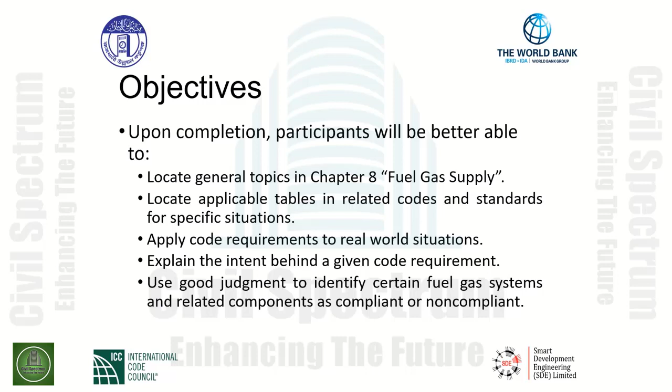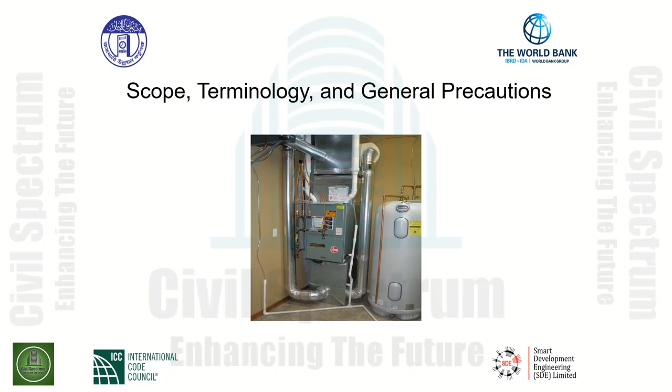We will be discussing the scope, terminology, and general precautions related to fuel gas supply, piping, and appliances. Chapter 8, Section 8.1, General. This section regulates aspects of fuel gas distribution systems, including the design, installation, testing, repair, and maintenance.

The applicability of this chapter is limited to the customer's side or the consumer side of the gas supply company's distribution system. It does not cover any utility, any company's distribution. We are concerned with this point that the customer receives the supply from the company's endpoint of this system. The code governs all piping and system components from the endpoint of the gas supply company's service line to the

supplied appliances and equipment. This is important language because we need to know where we need to start when we reference this code, so it lays out a very clear determination of where we begin our administration, enforcement for design and installation, testing, repair, and maintenance of these systems. The point of delivery is used to determine where the code begins and ends. So that terminology, point of delivery, will be a discussion point for us to go over and clearly see where this code begins and, of course, this code ends.

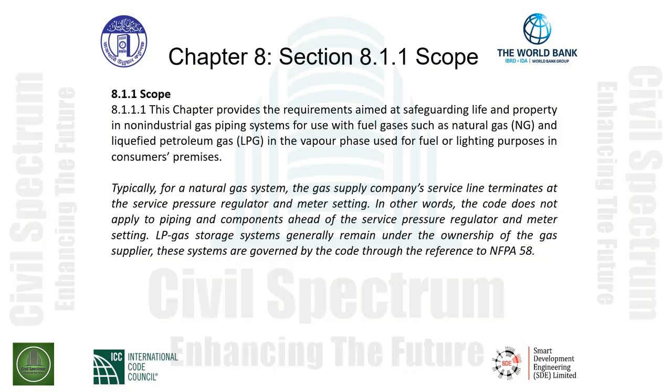Section 8.1.1.2 gives us references. As stated here, this chapter does not cover the safety requirements and rules for gas burning appliances. The requirements come from the National Fuel Gas Code 2009 edition, the NFPA 58 2008 edition, as well as the International Fuel Gas Code 2009 edition of the USA, and shall apply for such appliances. This section gives us the indication and directive for the code user to reference other codes for the safe installation of gas burning appliances.

So we will reference certain parts of the 2009 edition of the International Fuel Gas Code in this seminar, with key areas related to piping systems, appliances, and equipment regarding safe operation of appliances.

Section 8.1.1.3 gives us requirements of this chapter that state it does not apply to gas piping systems for industrial installation and applications. So we must completely understand that Chapter 8, Fuel Gas Supply, provides designers, contractors, and owners with information regarding whether this code applies to a given application or not. In this case, it's very clear that any industrial installations and applications are not part of this code. So the chapter does not apply to industrial installation and any industrial applications.

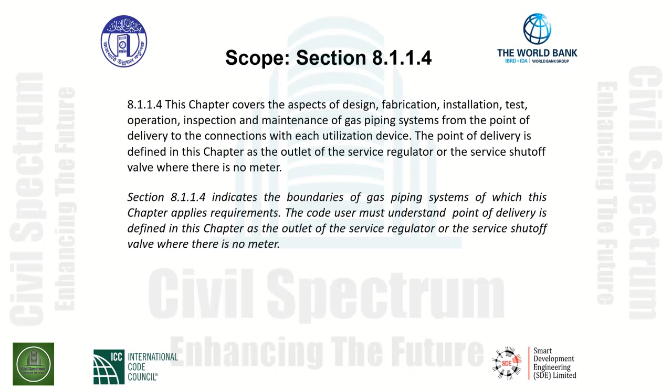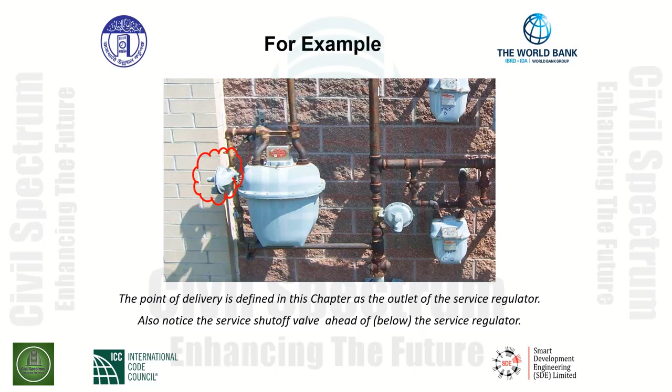For example, the picture that we're showing here is an indication of point of delivery. So the point of delivery is defined in this chapter as the outlet of the service regulator. Also notice the service shutoff valve ahead of the service regulator. What's clearly marked here is you can see towards the middle of the picture, the gas piping system comes up from an underground supply and rises up into a T. The left portion of the piping system from the branch of the T goes up and services the service regulator and enters the meter, supplying gas to the consumer side. So what we're really looking at here is the point that this code regulates the gas system, and you can clearly see that it is at the outlet of the regulator as indicated.

This section in particular gives us further detail. And as you can see, when we step through these sections in the scope, we have more and more details about the system. So section 8.1.1.5 gives us this requirement.

Piping systems covered here are limited to a maximum operating pressure of 3.45 kPa. The conversion is 14 inches water column or half PSIG. The maximum pressure must not be allowed to exceed 3.45 kilopascals. Displayed below is a meter assembly equipped with a service pressure regulator that can be set to a safe operating pressure after the point of delivery to the customer's gas piping system.

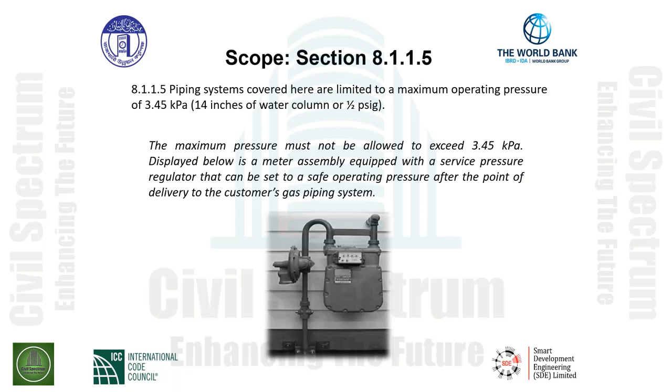As seen clearly here, the gas supply emerges from the underground piping system. It goes into a valve, which is your service valve, and out of the service valve into the service regulator. As an example, we have an LPG system here. The piping systems that are covered here, again, we reference code section 8.1.1.5, and we are limited to a maximum operating pressure.

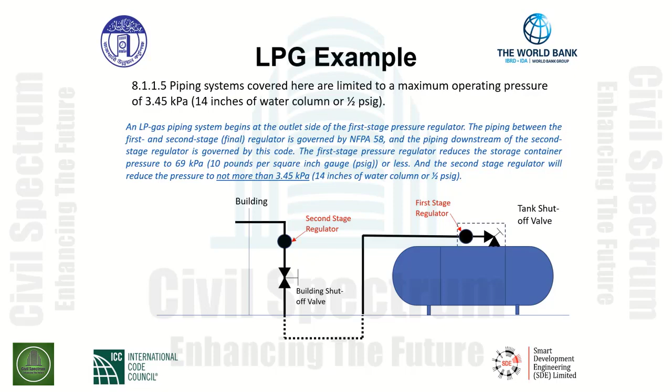Section 8.1.1.6. The manufacturer's installation instructions are evaluated by the listing agency, verifying compliance with the applicable standard. When we look at the listing agency, it can require that the manufacturer alter, delete, or add information to the instructions as necessary to achieve compliance with applicable standards and code requirements. We look to Section 8.1.1.6 as indicated here as a requirement of our gas code.

While applying the provisions of this chapter, reference should also be made to the manufacturer's instructions, not only the gas company supplies regulations, as well as other applicable codes and standards listed in this chapter or required by the authority having jurisdiction. This is a complete list of what has to be followed when we install, when we design appliances for our buildings that are supplied by fuel gas, whether it's LP gas or natural gas.

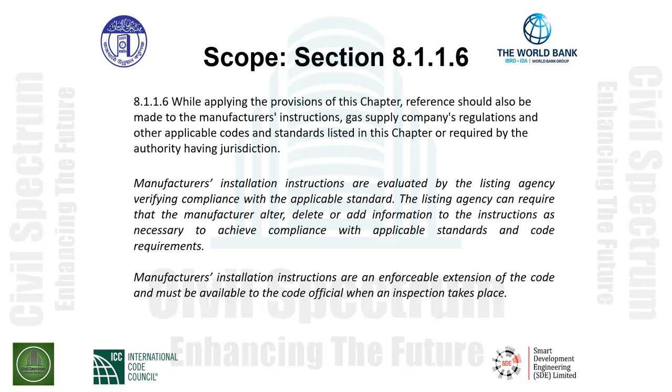Section 8.1.2, terminology, is a part of the code that gives us some good language here because we need to understand the terminology when it comes to gas systems. Not only gas piping systems, but references to components on the gas piping system. We use this section in our code that gives us the language to understand where this terminology comes from. So it starts off like this in Section 8.1.2 terminology. This section provides definition of terms used in this chapter of the code.

Where terms are not defined in this chapter, they shall be defined using their ordinarily accepted meanings, such as the context implies. The definitions in the chapter are the same as used in the National Fuel Gas Code 2009 edition. That's the NFPA 54 document, and the NFPA ANSI standard as well for liquefied petroleum gas code, NFPA 58, as well as the International Fuel Gas Code 2009 edition. And the last reference here in this code section is the National Building Code of India 2005 edition.

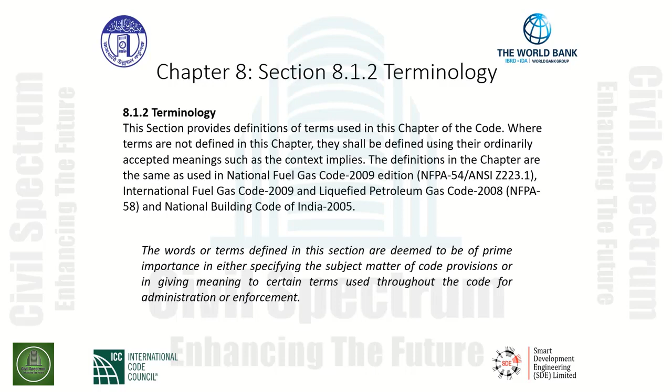As we continue our discussion of terminology, you must understand that a code provision could be misinterpreted if the definition of a term, as used in the context of the code, is not understood or not completely understood. The following slides will provide key definitions that will assist the code user to properly understand certain fuel gas components, appliances, and various equipment. We need to fully understand the terminology as given to us in this code for proper administration and the intent of this particular code.

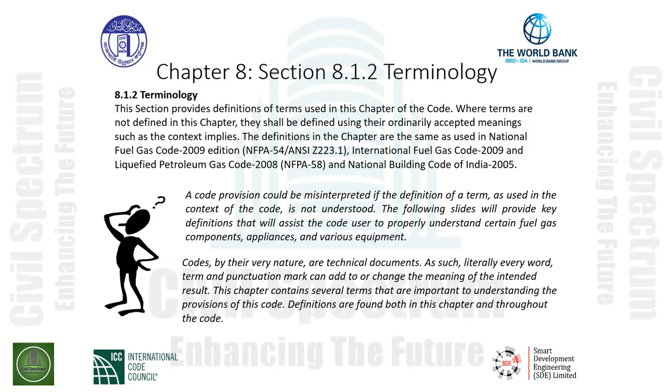Codes, by their very nature, are technical documents. As such, literally every word, term, and punctuation mark can add or change the meaning of the intended result. So this really drives us to understand the technical terminology of this code. This chapter contains several terms that are important to understand the provisions of this code. Definitions are found both in this chapter and throughout the code.

The next definition is appliance valve. This is a device that will shut off the gas supply to the burners. So the appliance valve that we're talking about here is the valve that we utilize, of course, to shut the gas supply off to the burners.

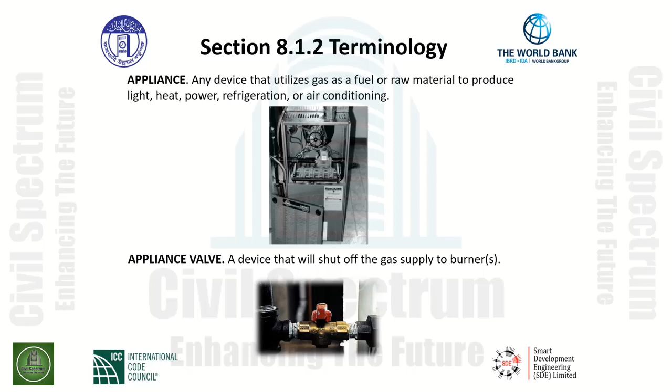Consumers or customers connection. This is the next definition or terminology that we need to understand. You recall the point of delivery. The point of delivery is in conjunction with this definition. And this definition states: piping tapped on the riser to supply gas to individual customer or consumer. The graphic shows that the customer's connection, of course, is at the outlet of the service regulator. And this is where we have the demarcation for the beginning of the system that is regulated by this code. Very important definition here.

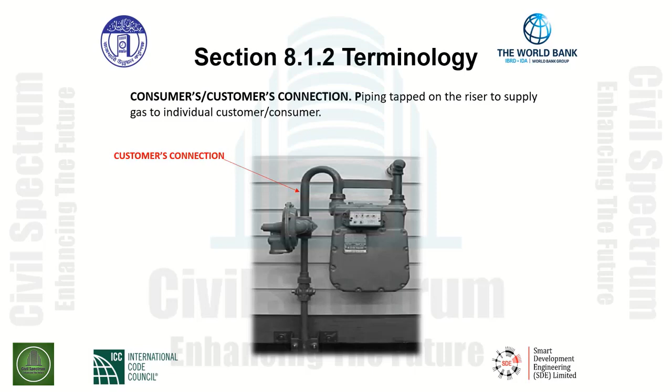In section 8.1.3, General Precautions, we have further information to go over to completely understand what we need to do with respect to any precautionary measures when we work on or install the gas piping system. Section 8.1.3.1 is titled Turn Gas Off. All gas piping work or gas appliance installation shall be performed with the gas turned off to eliminate hazards from leakage of gas.

This is very important here because not only do we have to protect the workers working on the gas line, but also the building occupants. We do not want to remove any fittings, any valves, any other components on the gas line without properly turning the gas off. In other words, when you turn the gas off, the function of purging, bleeding the gas out of the lines completely before working on certain sections of the gas piping system is important.

And when we relieve the pressure, we want to make sure that we relieve it somewhere to the outside of the building, never inside of the building, because that could create a mixture of gas leaking into the building, mixing with air, and it could be potentially damaging. We need to protect the property as well from potential fire and maybe explosive conditions. So that's why this section is in our code, because it is safety, and it is required for anybody working on the gas system to turn the gas completely off.

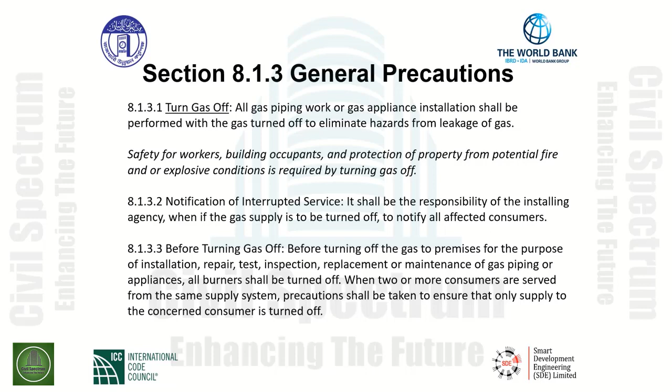Given the precautions that we've gone over, there are a few more safety concerns that are indicated in this code here, specifically smoking. Section 8.1.3.8 gives us this requirement: when working on piping which contains or has contained gas, smoking shall be prohibited. This is a major concern here. We do not need any source of ignition when we're working on gas systems due to the potential of ignition, fires, explosions, things of that nature. The potential regarding the ignition of gas vapors by workers is of particular concern while working on the gas piping. And as seen here, smoking is specifically prohibited in this section.

Handling of flammable liquids is given to us in section 8.1.3.9. Flammable liquids used by the installer shall be handled with proper precautions and shall not be left within the premises from the end of one working day to the beginning of the next. Any type of flammable liquids must be taken off the premises. We cannot leave any type of flammable liquids there due to the inherent hazards that may be affected to the people within the building. They must be taken off the premises at the end of the working day.

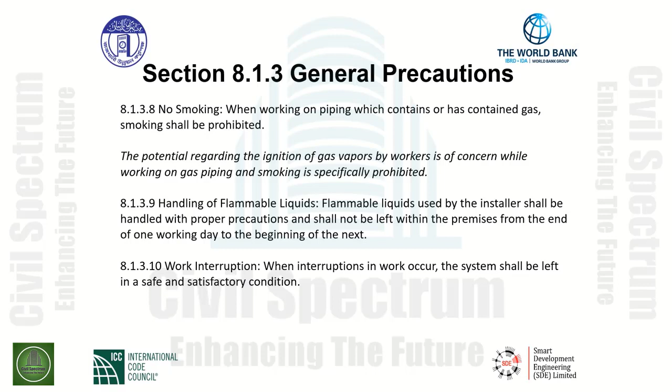Whenever interruptions in work occur, the system shall be left in a safe and satisfactory condition. The very last section here on this slide indicates that whenever you have interruptions in the work, we need to leave the system in a very safe and satisfactory condition. If we're working on the piping systems, ladies and gentlemen, and we have to replace a faulty valve, we first begin with shutting down the gas piping system. Opening up the system, replacing perhaps a faulty valve, we need to make sure that the gas piping system has then been tested for any leaks and left in a safe and satisfactory condition. So, a good general precaution.

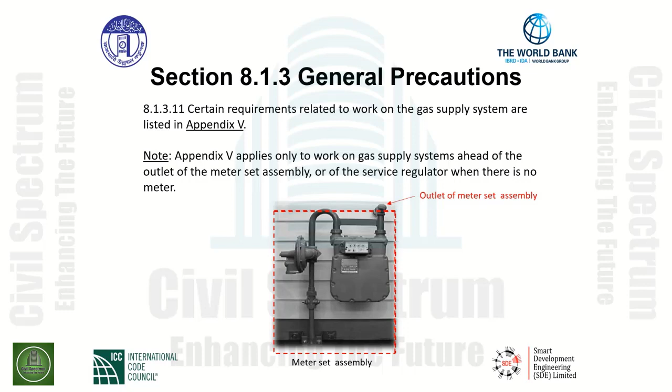In section 8.1.3.11, we are given a direction regarding requirements when we are working on the gas supply system. As seen here in this particular section, certain requirements related to work on the gas supply system are listed in Appendix V. A particular note when you reference Appendix V is that it only applies to work on gas supply systems ahead of the outlet of the meter set assembly or of the service regulator where there is no meter. We have a picture here indicating the meter set as well as the service regulator. So it's very clear that Appendix V applies to systems ahead of the outlet of the meter set. As indicated in the picture, the outlet of the meter set assembly appears on the right-hand side. If there were no meter, then it would be at the outlet of the service regulator. Appendix V is very clear about where the work begins with respect to the requirements of this code.

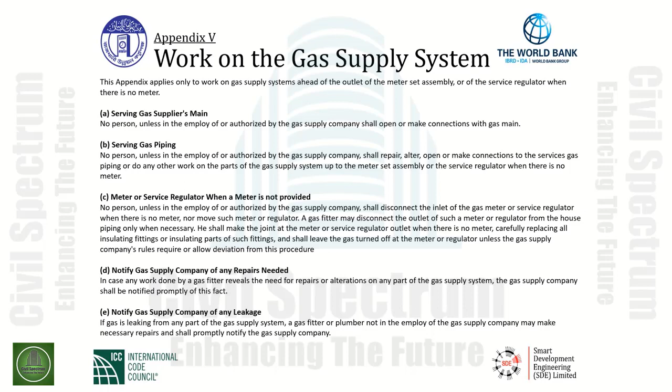Now, the very last one here, notify gas supply company of any leakage. This is item E. If gas is leaking from any part of the gas supply system, a gas fitter or plumber not in the employ of the gas supply company may make necessary repairs and shall promptly notify the gas supply company. There we have it, Appendix V. This is where we go to work on gas supply system. All the requirements are given here to the code user.

Notification of completion. Section 8.1.4.1 gives us, when regulations so require, the completion of installation shall be notified to the gas supply company or the authority. So whenever we have a new gas system installed, we need to notify the authority for proper installation, maybe inspection, testing, and startup of the gas system.

Section 8.2.2 is titled Size of Piping to Gas Appliances. This section is very important not only to the designer but to the installer as well. Properly understanding some of the design constraints, the analysis that has to be done before any gas piping system is even proposed, we need to understand certain factors that go into the design procedure.

Section 8.2.2.1 gives us the following. Gas piping shall be of such size and so installed to ensure adequate supply of gas to meet the maximum demand without undue pressure drop between the meter or service regulator, where there is no meter, and the appliance or appliances. Section 8.2.2.2 tells us a little bit more about the factors that need to be considered here. It indicates the following. The size of gas piping depends upon the following factors.

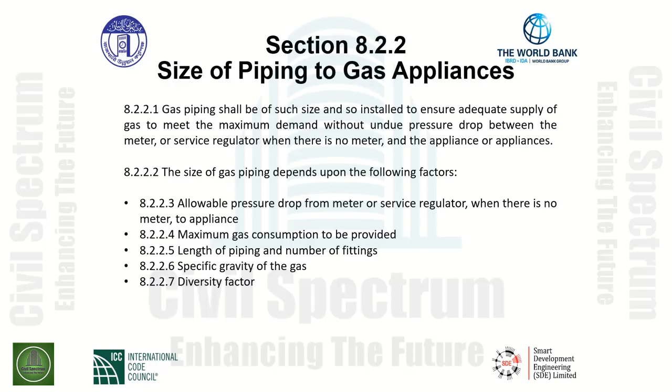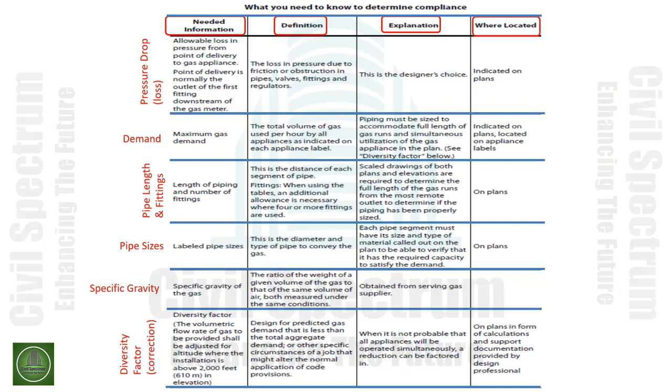Unless, of course, there's some diversity factor that we discussed, as indicated in the previous chart. However, any exceptions to this principle must be substantiated with full documentation in a plan review of the gas piping system. The systems must contain adequate capacity for anticipated modifications, maybe additions, or additional appliances. The evaluation must be conducted on the complete system as it will be configured after the appliances are added.

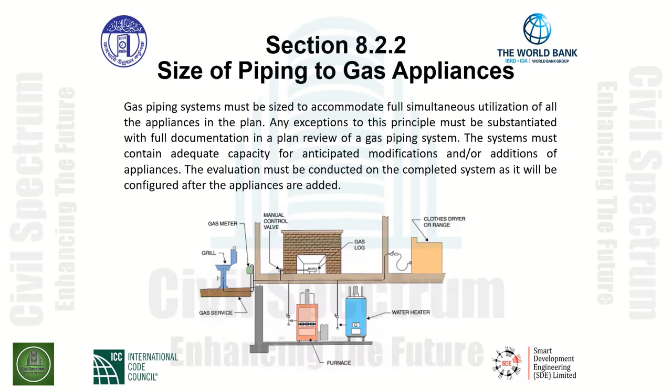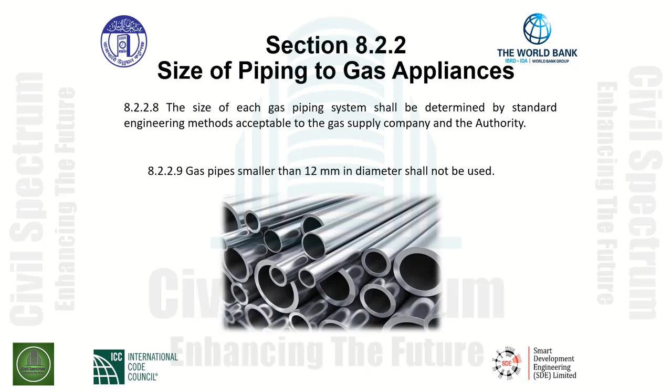Section 8.2.2.8, the size of each gas piping system shall be determined by standard engineering methods acceptable to the gas supply company and the authority. We will first look at Section 8.2.2.9. Gas pipes smaller than 12 millimeter in diameter shall not be used. This is the first requirement that is limiting the materials that are permitted to be used. So in this case, we cannot use any piping smaller than 12 millimeter in diameter.

We have a prohibited material here in the next section. And again, we're talking about acceptable piping materials. Section 8.2.3.1 gives us a reference as seen here. It indicates the following: piping material shall be one of the materials listed in Table 8.8.1, conforming to the corresponding standards, or other materials as may be approved by the gas supply company or authority.

Finally, cast iron pipe shall not be used. Think of the material characteristics of cast iron pipe. Cast iron pipe is brittle compared to malleable metals. It's more likely to fail under stress. Brittle materials crack, ladies and gentlemen. We do not want any gas piping or any part thereof subjected to leaks, things of that nature. Materials must be durable for the suitable gas piping system to be designed, and this here prohibits specifically cast iron pipe.

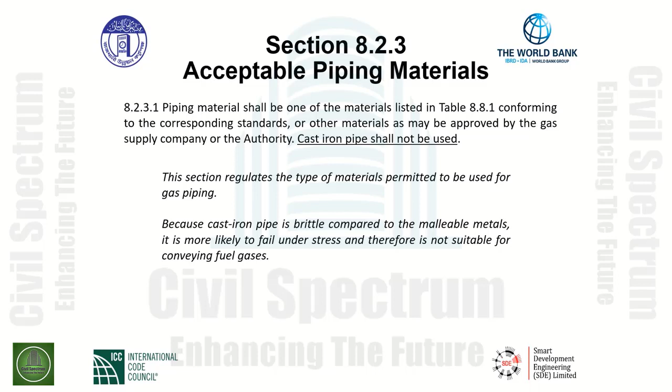Understanding that this is the very first section that we run into that gives us regulations of the type of materials permitted to be used for gas piping. The reference is given to us by means of a table that we will locate. Section 8.2.3, Acceptable Piping Materials, contains Table

8.8.1. When we look at this table, on the left-hand side, the table indicates the piping materials that are suitable for gas piping systems. Some of the materials you'll see are black steel pipe, galvanized steel pipe, wrought steel, wrought iron pipe, corrugated stainless steel tubing, abbreviated CSST, can be utilized as well. That is a manufactured product, and it is a proprietary type of product with manufacturer's installation instructions. As seen, other permitted materials are copper or copper alloy tubing, type K or type L, aluminum pipe and tubing, and finally plastic pipe and tubing.

The asterisk indicates minimum Schedule 40 pipe, as indicated for black steel, galvanized, and wrought steel piping materials. On the right-hand side, there are the associated standards, ladies and gentlemen, that the piping is manufactured to, tested to. These are standards that are listed for use with respect to the associated materials. When you install the piping materials, it's easy for the inspector to locate the piping and understand the standards due to the manufacturer's stamping on the pipes accordingly. To the right of the table, we have an example. Black steel pipe, Schedule 40. As you can see, steel pipe must be Schedule 40 or heavier, and it must comply with one of the listed standards and can be black iron or galvanized accordingly.

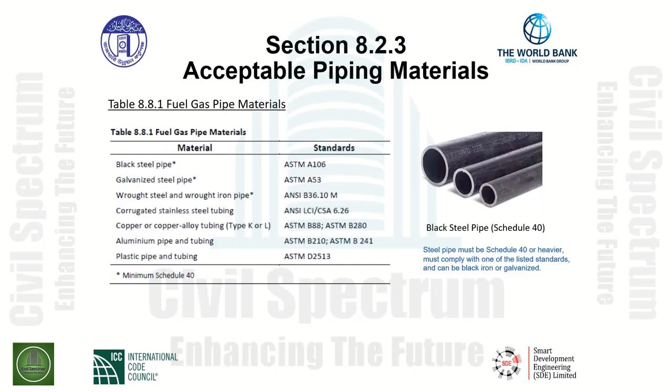Another material that is in the table is corrugated stainless steel tubing. Now, as indicated before, we have a standard that this particular tubing needs to comply with. It's ANSI LC1 or CSA 6.26. This provides material and performance criteria regarding this specific material.

Now, corrugated stainless steel tubing is just that. It's a stainless steel material. It has corrugations in the tubing, and it is manufactured specifically for gas piping systems. However, the installation requirements are proprietary to the manufacturer that manufactures this particular material.

It's a manufactured gas piping system with several proprietary components like valves, fittings. We have what's called a two-piece ferrule type fitting. It's actually a compression fitting that, when made properly in accordance with the manufacturer's installation instructions, will make a good gas-tight seal.

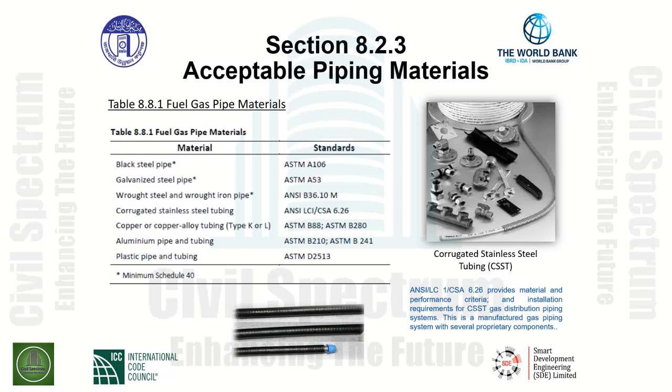Another material that is permitted is copper or copper alloy tubing. The designer has two choices here, whether to use type K or type L copper. Type K copper is your thicker wall copper. Type L is your next wall thickness that is a little bit thinner than type K. In either condition, there are two standards listed in the table. So copper tubing needs to comply with standard ASTM B88 or ASTM B280.

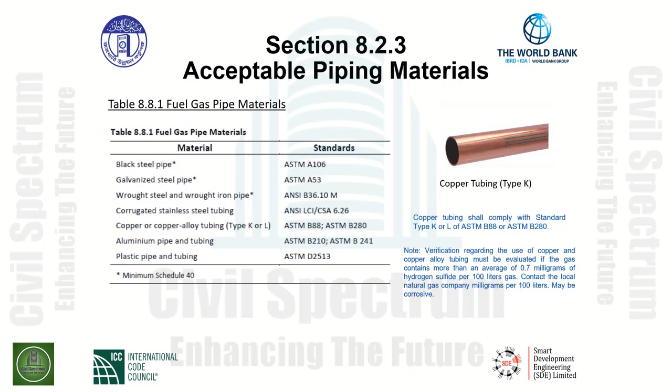Now, just a note, verification must be obtained from the designer prior to using copper or copper alloy tubing, due to the fact that in some cases, if the gas contains more than an average of 0.7 milligrams of hydrogen sulfide per 100 liters of gas, you need to contact the local natural gas company to find out exactly what the concentration of hydrogen sulfide is. Hydrogen sulfide has a corrosive type of effect on copper materials, so it's advantageous to understand that initially before selecting materials for the gas piping system.

Another material that's indicated in the table is aluminum pipe. Aluminum alloy pipe shall comply with ASTM B241, except that the use of alloy 5456 is prohibited. Aluminum alloy pipe shall be marked at each end of the pipe length, indicating compliance. So we're looking for the marking of the standards on the pipe itself.

Aluminum alloy pipe needs to be coated to protect against external corrosion. Of course, when it's in contact with masonry, plaster, or insulation, or is subject to repeated wettings by liquids such as water, detergents, or sewage. Aluminum alloy pipe shall not be used in exterior locations or underground.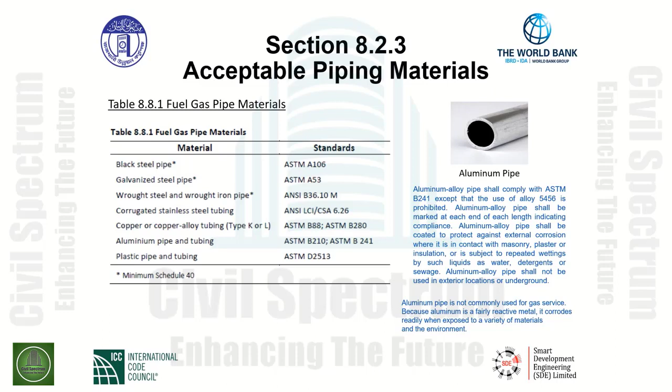Understanding some of the material constraints here helps us understand when and where to select piping materials based upon your given application. So as designers, we need to focus in on the application. Where is this piping going to be installed? And select proper durable materials for the environment as well. So aluminum pipe is not commonly used for gas service because aluminum is a fairly reactive material. It corrodes readily when exposed to a variety of materials and the environment. However, it can be used in certain areas. And again, this is up to the designer to select the correct material.

Plastic pipe is listed in the table, plastic pipe and tubing. The installation of plastic pipe and tubing is limited to areas that are both outside of the building, outdoors, and underground because of the potential hazard associated with the use of the material. It has a lower resistance to physical damage and heat compared to metallic pipe and tubing that are given to us in the table.

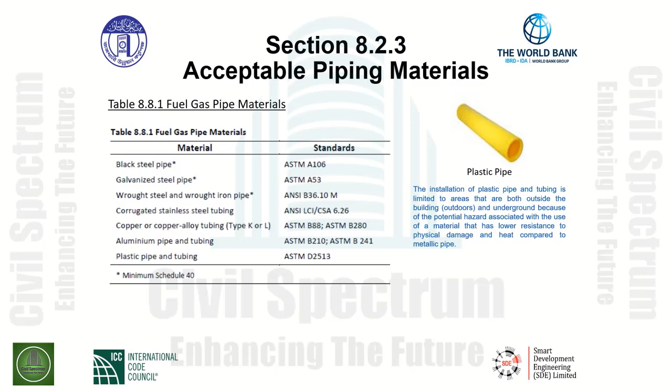Section 8.2.4 is the section that we go to for fabrication of piping for installation. Now, when we enter this section, we are given some information here regarding gas piping, tubing, and fittings. 8.2.4.1 gives us this initial information and requirement for this piping to be installed accordingly.

Gas pipe or tubing and fittings shall be clean and free from cutting burrs and defects in structure or threading, and shall be thoroughly brushed with chips and scale blown. In other words, we don't want any type of debris to be integrated from the process of installation into the system. We need to make sure that we have a good, clean piping system.

Defects in pipe or tubing or fittings shall not be repaired. When defective pipe, tubing, or fittings have been identified, the defective material shall be replaced. Again, we want to install a good, clean, adequate piping system that meets the design.

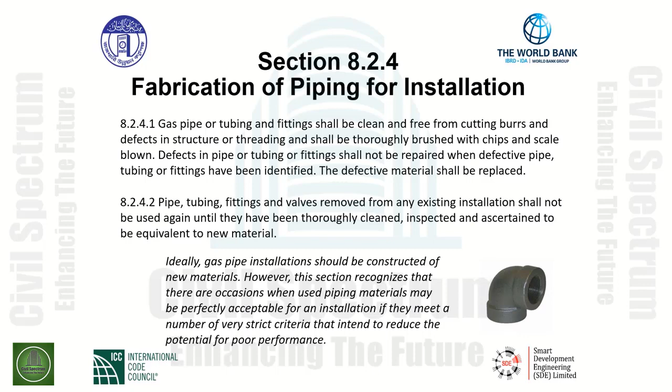reuse of existing materials. If the materials are adequate, durable, and ascertained to be equivalent to the new material, then the authority may accept these materials as being acceptable for installation in the gas piping system. We need to make sure, though, that the materials meet the standards accordingly, and there are some very strict criteria that intend to reduce the potential for poor performance. That's what the standards are all about for materials. We need to make a complete system installed in a safe manner that conveys the adequate volume of gas under pressure as designed by the engineer.

Here we have an example of a newer press-type fitting. The ICC International Fuel Gas Code now recognizes new pipe joining fittings like this for copper pipe, copper tubing. Press connect fittings that comply with ANSI LC4 are allowed for copper piping and tubing. They're similar, but they're not interchangeable with those used in the plumbing industry.

As stated and can be seen here, we have an example of the fitting and a detail. As you see here, the yellow elastomeric O-rings that are integrated and manufactured into the fitting provide the seal from the fitting to the copper tubing. The proprietary compression tool that is used to compress the fitting to the pipe actually provides a force that crimps the fitting onto the pipe. When this force is applied, the end result is a gas-tight fitting. So again, the press tool compresses the portion of the fitting around the O-ring that's integrated and manufactured into the fitting.

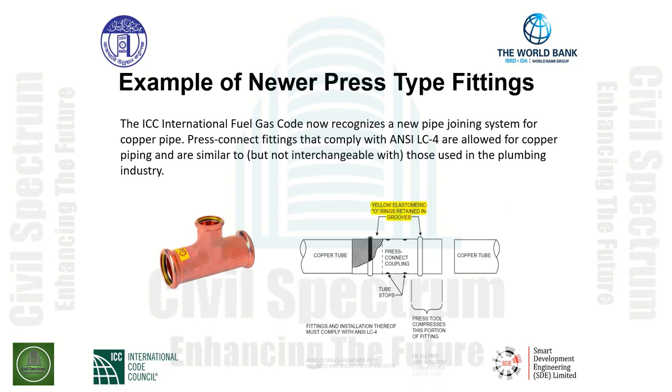Fabrication is integrated here. We also have to take a look at section 8.2.4.5. Whenever we have piping and fittings used in different environments, this section gives us some requirements. When used in a corrosive environment, metallic pipes and fittings shall be protected with corrosion-resistant coatings. We need to prevent any type of corrosion that could be detrimental to the pipes, the fittings, and cause leakages, failure of fittings over time.

Section 8.2.4.6 gives us the requirement for any thread joint, proper sealant shall be used on the made threads only. Therefore, we use it on the threads only. 8.2.4.7, joints and joining compounds, if used in LPG installations, shall be resistant to the action of liquid petroleum gas.

Now, certain compounds may react with LPG. It's up to the designer to properly specify what type of joining methods, compounds may be used in that type of system. LP gas can react with some pipe sealants. This also may be the case for other gases as well. Therefore, the text simply requires that the sealant be compatible with whatever is conveyed in the piping.

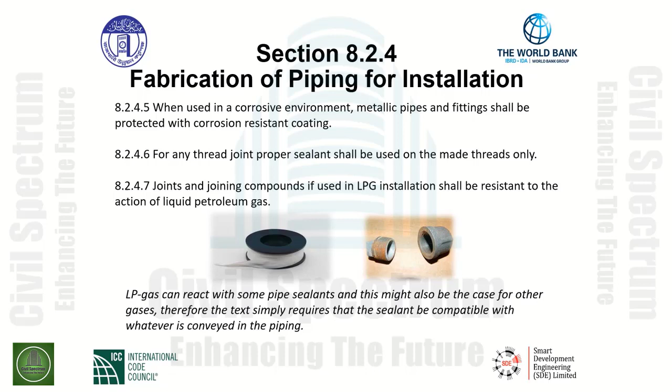8.2.5.1, installation, repair, and replacement of gas piping or appliances shall be performed only by a qualified installing agency or gas fitter. We need people that have qualifications to practice good piping standards, good piping installation standards for replacement of gas piping, replacement of appliances, or other components on the gas piping system. These people are trained for that particular application.

8.2.5.2, piping shall be buried to a minimum depth of 1 meter, covered in a manner so as to protect the piping from physical damage. It shall be protected from physical damage when it passes through flower beds, shrub beds, and other such cultivated areas. The depth here, ladies and gentlemen, is to provide some protection from things such as cultivating materials and tools utilized to dig up the surrounding earth, such that we do not hit the gas piping system and cause damage or even leakage to the system.

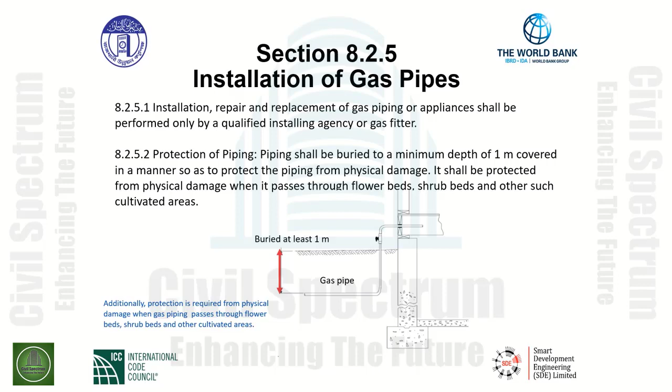So we have a minimum depth indicated here of 1 meter. As you can see by the graphic here, the gas pipe is buried at least 1 meter below the finish grade accordingly. Additionally, keeping in mind, we need to protect this gas piping from damage. Protection against corrosion. Whenever we have gas piping, ladies and gentlemen, in contact with the earth or other materials that will corrode the piping, we need to protect it in an approved manner.

There are plenty of materials out there to protect gas piping systems. However, the very last sentence of section 8.2.5.3 tells us the following: when dissimilar metals are joined underground, an insulating coupling or fitting shall be used. So we're concerned with different types of metals that could have a corrosive action or effect on the piping materials. Last, piping shall not be laid in contact with cinder or ash. This has a direct corrosive effect on materials in the environment, such that we look to metallic piping materials as being affected by cinders and ash.

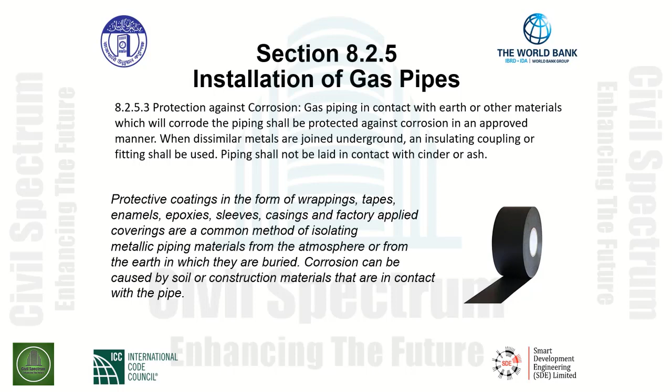So the protective coatings come in the form of wrappings, tapes, enamels, epoxies, sleeves, casings, and factory-applied coverings. These are common methods of isolating metallic piping materials from the atmosphere or even from the earth in which they're buried. Corrosion can be caused by soil or construction materials that are in contact with the pipe. So this section gives you the requirements to protect the gas piping system from corrosion.

8.2.5.5. When piping is passed through foundation walls, this section helps us understand when and where and how to provide the installation of gas piping through the foundation wall. It states the following. This code section will give you the requirement as follows. Underground gas piping, when installed below grade through the outer foundation or basement wall of a building, shall be either encased in a protective sleeve or protected by an approved device or method. The piping or sleeve shall be sealed at the foundation or basement wall to prevent entry of gas or water.

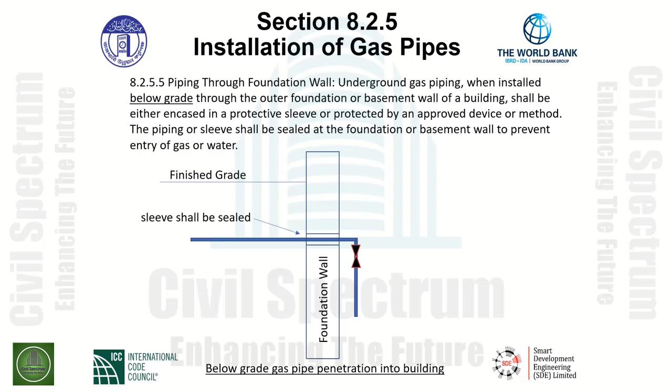Section 8.2.5.9, piping entrance to buildings. When gas pipe enters a building through a wall or floor of masonry or concrete, it shall be sealed against the entrance of water, moisture, or gas.

Like the previous section we talked about, this application shows that the piping emerges from the grade underground and enters the building above grade. According to this section, we apply the requirement and seal the piping against entrance of water, moisture, or gas. So this is an above grade application of gas piping penetrating into the building.

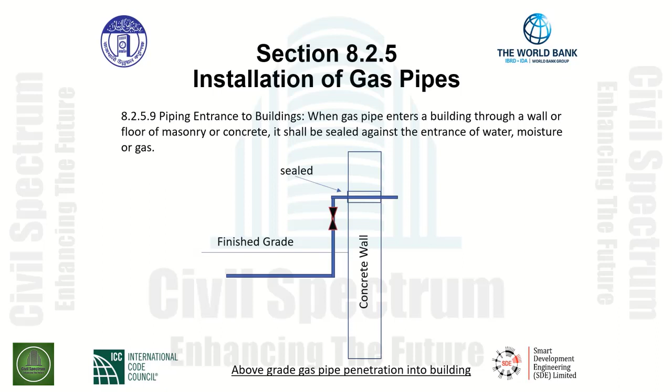8.2.5.8 gives us the requirement for piping supports. Gas piping in buildings shall be supported with pipe hooks, metal pipe straps, bands or hangers of an approved type, and material suitable for the size of piping. And it must be of adequate strength and quality and located at specific intervals so that the piping cannot be moved accidentally from the installed position. Gas piping shall not be supported by other piping. Indicated below is some additional information.

The International Code Council's International Fuel Gas Code and NFPA 54 provides a table for maximum support intervals. As seen here, the table is split into two halves, if you will. The left-hand side of the table gives us requirements for steel pipe of various sizes and the spacing of supports. On the right side, it gives us information for the nominal size of tubing, smooth wall tubing in the outside diameter, as well as spacing of supports. As you can see here, the table is based upon the pipe diameters and the spacing of supports.

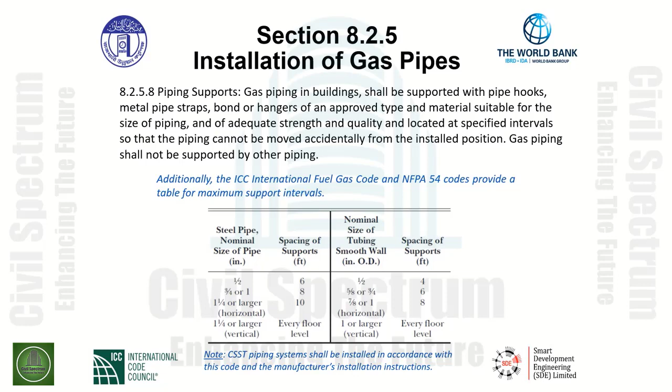We are permitted to install piping within solid floors. Section 8.2.5.10 gives us a requirement to install the piping in such a manner. Piping in solid floors, such as concrete, shall be laid in channels in the floor suitably covered to provide access to the piping with minimum damage to the building. We see a graphic here of concrete being channeled below the finish elevation.

This is where we place the pipe into the channel, and we could have a removable cover as indicated to provide suitability to access the gas pipe that is below the finished concrete slab for any type of maintenance, repair, or even replacement. We have a section view below indicating the metal cover and the gas piping below the finish elevation of the concrete slab.

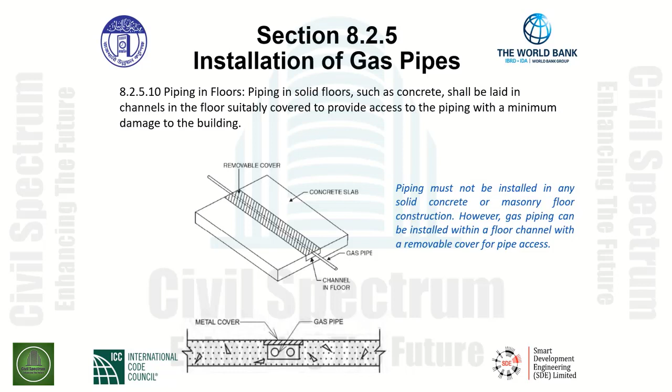Changes in direction of gas pipe shall be made by the use of approved fittings. Approved fittings may be threaded fittings on Schedule 40 steel pipe. They may be fittings associated with copper tubing, or they may be bending of pipe, factory bends or field bends. Whenever we field bend piping, ladies and gentlemen, they must be bent by employing approved procedures and equipment. We have pipe benders, ladies and gentlemen, that actually work to our benefit.

The correct pipe bender for the correct outside diameter of pipe ensures that when the gas fitter properly attaches the pipe bending apparatus to the pipe, once bent, it will be free from any kind of internal radius buckling or kinking of the pipe that may alter the flow within the system. So this section is key here. The driving language here is field bends shall be made by employing approved procedures and equipment.

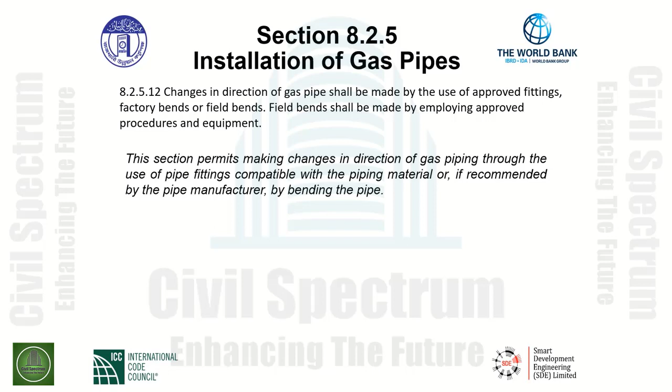As shown here, there is a typical radius that is referenced in our standards, especially for metallic tubing. The radius shall not be less than 6 times the outside diameter of the tubing. What we don't want to do is flatten out that internal radius as indicated here, or have any buckling or kinking of the pipe that reduces the interior diameter of the tubing.

So pipe must be bent with appropriate bending tools and materials. Some materials are not tempered or even intended to be bent, so consideration must be given to choosing the proper materials. Bending tools are designed to make bends without damaging the pipe. Pipe intended to be bent has a minimum bending radius which must be observed to avoid any damage to the pipe and any restrictions in flow.

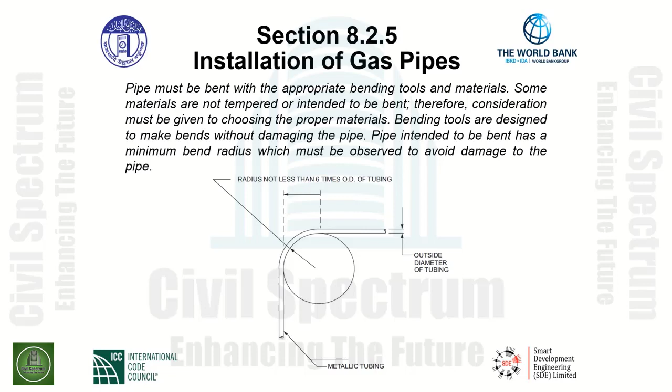Gas piping, according to section 8.2.5.13, indicates that we cannot run gas piping through any air duct, any chimney, or even a gas vent, ventilating duct, or elevator shafts.

We need to be concerned where gas piping will be placed within the buildings. We don't want to create any type of dangerous condition where gas may be allowed to accumulate by leakage or damage to the piping. So an air duct supply or an area that creates a shaft provides a path for the gas to travel, and these are considered locations where a gas leak could be compounded by spreading the gas or any resulting fire through the building. We need to understand exactly where this piping is to be installed.

Also, in some locations, the gas piping could be subject to deterioration because of temperature or corrosive conditions, such as in air ducts or chimneys.

Additionally, piping located in an elevator shaft may be subject to an additional hazard, resulting in mechanical damage to the pipe. In this condition or environment, damage from an elevator impacting the fuel gas piping may not only cause a leak, but it would also allow the gas to escape and travel up the elevator shaft. This puts an undue hazard on any occupants within the building and puts them in immediate danger. We need to avoid this.

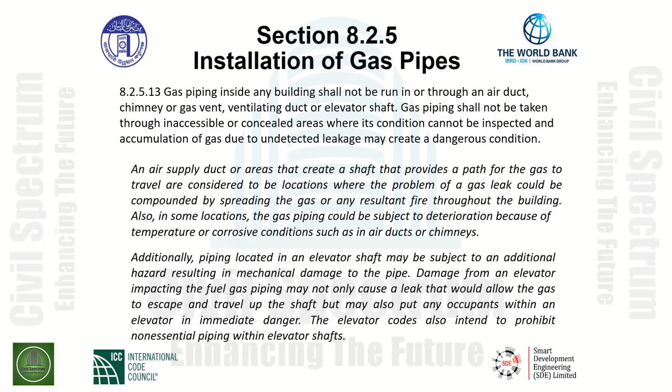8.2.5.21. We need to grade gas piping, ladies and gentlemen. That is, we need to pitch the gas piping according to this section. All gas piping shall be graded not less than 1 in 750 to prevent accumulation of condensation or liquids in the line. All horizontal lines shall grade to risers, and from the risers to the meter or service regulator when there is no meter, or to the appliance.

Now, this is where we deal with condensation or liquids in the line, such as wet gas being supplied, in which case we have to provide drips according to the code, or according to manufacturer's installation instructions. We need to provide the pitch to these specific areas as indicated in this code section, such that we do not block the gas piping system from the desired flow and pressure as designed. Again, when you have wet gas systems, maintenance is of the utmost importance to provide drainage of these particular locations periodically.

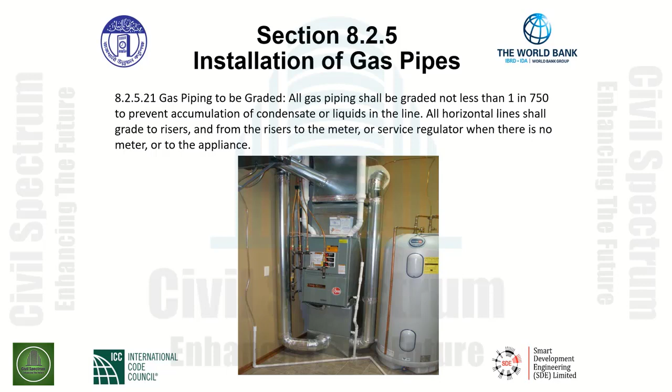The gas piping needs to be painted red in order to differentiate it from other piping. Where piping is exposed to sun rays, it shall be painted silver gray. When we think about the colors of materials outside, we're concerned with the sun's radiant energy, and we don't want any dark colors because dark colors absorb heat. We want more of a reflective type of paint, and as indicated in this section, silver gray will intuitively reflect the sun's radiant energy.

If it's inside the building, not exposed to the sun, then we need to make sure that we have red paint to differentiate the gas piping from any other piping. We do not want any undue confusion within the building of some worker thinking that the gas pipe is actually some other system and cutting into the pipe, causing leaks.

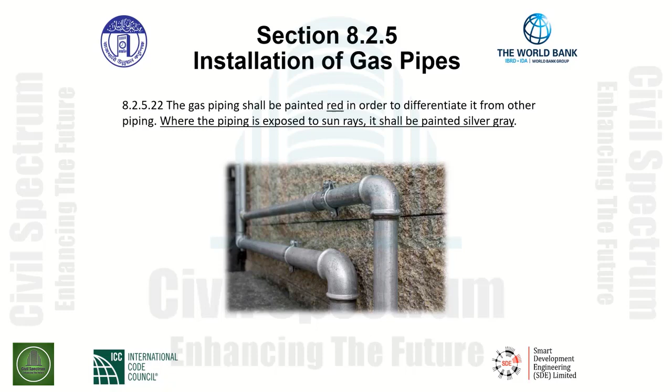When using this code, we have a reference to Appendix W. The code section that gives us this reference is 8.2.5.23, and it states the following: documentation shall be maintained for all gas supply installations. When we look to Appendix W, it gives us specific documentation for piping installation.

Item A indicates that application for gas connection in prescribed form, along with approved plan of the building where the gas is to be used. If a building is not approved by the authority, its plan is to be prepared by an approved contractor of the gas supply company. So right there is a requirement from the authority on who is permitted to prepare the plan for the gas supply system.

B, an approved contractor of the gas supply company shall prepare the plan of the gas piping system for the building. The plan is to include plan and elevation of the proposed piping system. The plan so prepared shall be submitted to the gas supply company. Item C gives us the requirement for documentation. Installation of the piping system as approved by the gas supply company shall be carried out by an approved contractor of the gas supply company.

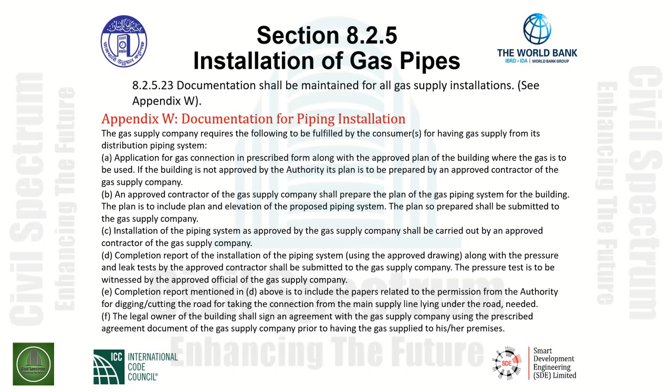Item E, completion report mentioned in item D above is to include the papers related to the permission from the authority for digging, cutting the road, for taking the connection from the main supply line lying under the road needed. Item F, the legal owner of the building shall sign an agreement with the gas supply company using the prescribed agreement document of the gas supply company prior to having the gas supplied to his or her premises. So as can be seen in items A through F, this is the documentation. These are specific requirements for piping installation.

Section 8.2.6.1 gives us information regarding pressure regulators. Where the pressure of gas supplied to a domestic installation or even other low-pressure gas piping systems in buildings is in excess of 3.45 kPa, a gas pressure regulator of approved type and size shall be installed in the service pipe of each such system.

This is needed, ladies and gentlemen, to prevent pressure in excess of 3.45 kPa from being introduced into such a building piping system. If the building pipe is of welded construction, the pressure regulator may be located upstream of the gas meter in each consumer's premises. In these cases, the gas pressure in the piping downstream of the gas pressure regulator shall not exceed 3.45 kPa.

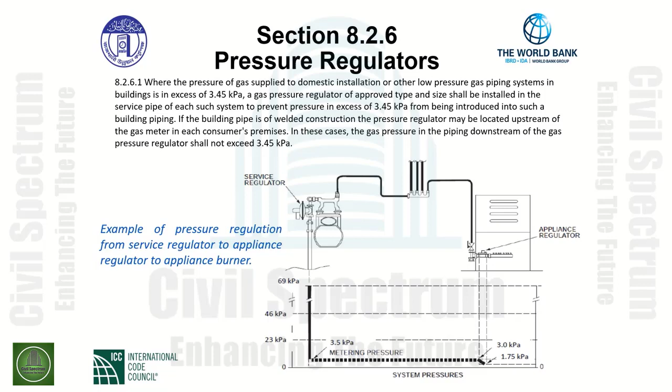If installed inside a building, the regulator shall comply with the following. So if we install it in a building, we need to comply with this particular code section. 8.2.6.3: if any of the diaphragms of the regulator ruptures, the gas shall be directed to an outlet vent pipe made of brass or plastic in order to vent the gas out of the building. The vent pipe shall be installed about 1 meter above the topmost story of the building in open air. Means shall be employed to prevent water from entering the pipe and also to prevent blocking it by insects or other foreign bodies. When we reference this specific requirement, we have some examples below.

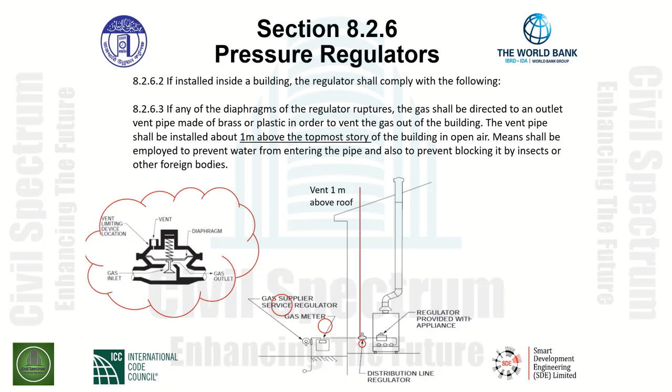Looking at the elevation view, we can see the red pipe indicates the vent all the way attached from the regulator to at least 1 meter above the topmost story, or in this case, the roof itself. Pressure regulators are extremely important devices. They're relied on to prevent overpressurization of appliances and equipment. This is where we fine-tune the pressures in our gas piping systems.

So typical gas appliance controls are not designed to tolerate a pressure of more than 3.5 kPa. The standards that regulate the design and function of appliance gas controls require that the controls be tested for resistance to permanent damage resulting from exposure to excessive gas supply pressure. So that's something that we need to think about when we specify these regulators. We want to specify good regulators that meet standards. To further explain this, each function of the gas controls must be tested for exposure to 17 kPa pressure for a period of 1 minute, after which the control must function normally.

Again, this is all a function of testing standards and good quality materials that we will specify in the gas piping system. As inspectors, we are to look at the approved construction documents and make sure that these good quality controls that have been designed by the engineer are installed in the gas piping system.

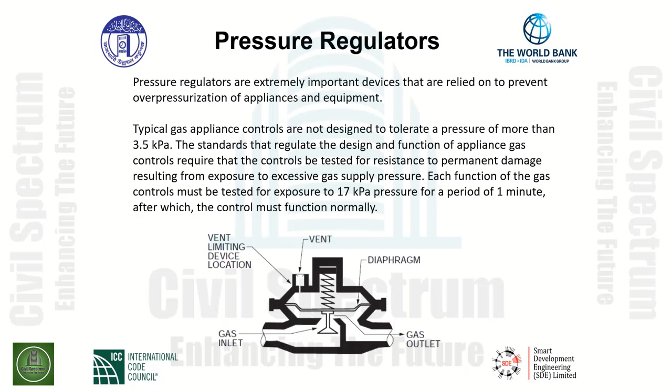Service shutoff valves. We have two requirements that indicate service shutoff valves be provided. And where are they to be located? In section 8.2.7.1, we need to provide service shutoff valves on all new services, including replacements, and they need to be installed in a readily accessible location.

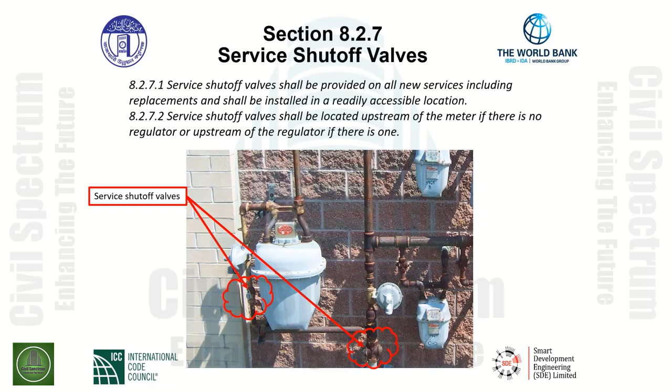Now, section 8.2.7.2 tells us that the service shutoff valves need to be located upstream of the meter if there is no regulator, or upstream of the regulator, if there is one. We have a regulator installed at the meter, the large meter that you can see on the left-hand side. We have to have a service valve located upstream of that regulator. Upstream means prior to supplying the regulator, and as you can see below that regulator, there is, in fact, a valve at that point. And that complies with this section of code.

All gas services, however, operating at pressures greater than 3.45 kPa need to be equipped with a shutoff valve of an approved type, and it needs to be installed on the service pipe outside of the building. This is regulated by the code section 8.2.7.3. The picture shows us the service shutoff valve installed according to this particular code section.

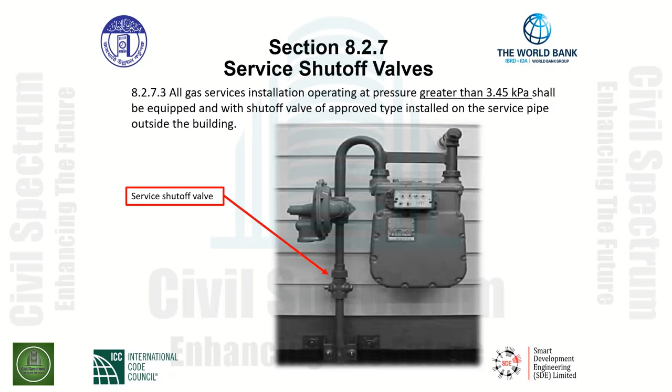Every gas outlet needs to have an individual shutoff valve required by 8.2.7.5. The shutoff valve shall be accessible and adjacent to the appliance. We can see we've got a water heating device here. As such, we have the shutoff valve that is accessible and it is adjacent to the appliance as required by this code section.

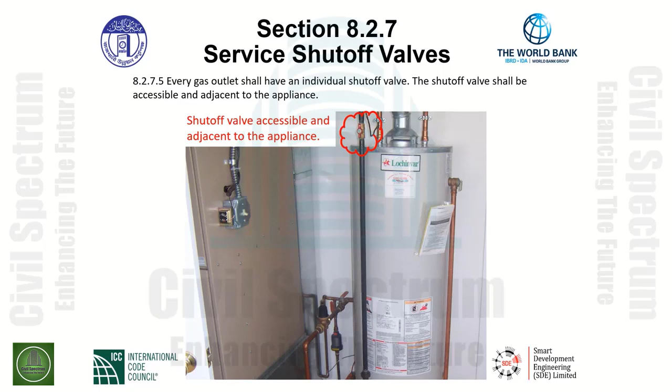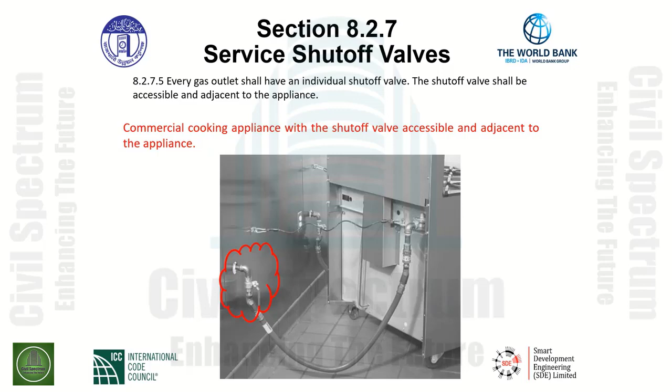Another application is where we have a commercial cooking appliance. In this case, the shutoff valve is again accessible and adjacent to the appliance. According to 8.2.9.1, no person shall use or even permit the use of a new system or even an extension of an old system of gas piping in a building or structure before the same has been inspected and tested to ensure that the system is safe and a certificate has been issued by the authority. The reference here is see Appendix W.

You remember the documentation that needed to be provided to the authority for the gas piping system. 8.2.9.2 gives us testing of piping for tightness. The system needs to be tested, ladies and gentlemen, so we can verify that the construction and installation of the piping system is gas tight and it will not leak. And it must be tested to be approved and prior to operation verified that it is tight.

Where any part of the system is to be enclosed or concealed, the test should be done prior to the work of closing in. So what we're saying here is we need to test segments of the gas piping system that are going to be either enclosed or concealed prior to concealing it in the construction. So as inspectors, we may have to be called out and look at the testing to be done and looking at the proper materials and fittings that make up the part of the system that will be concealed prior to building construction around that. The test medium shall be air, nitrogen, carbon dioxide, or an inert gas.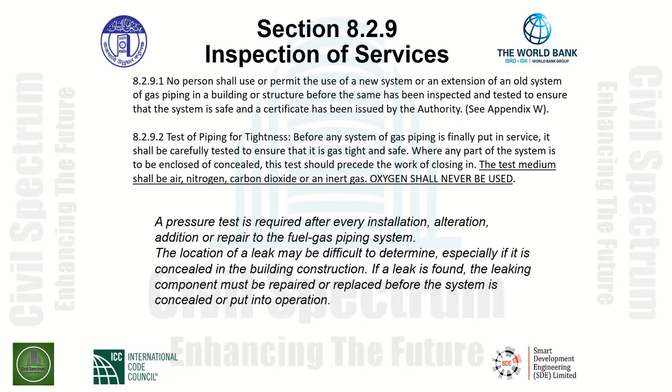Inspection of services, again, takes on another requirement here. Before the appliances are connected, the piping systems are required by this section 8.2.9.3 to be tested at a pressure of at least 159 millimeters of mercury for a period of not less than 10 minutes. And 159 millimeters of mercury is the equivalent to 20 kPa of pressure. Again, this is for 10 minutes without showing any pressure drop. And the source of pressure shall be isolated before the pressure tests are performed. In other words, the gas outlets need to be capped off tightly.

We need to provide some type of gauge and a Schrader valve to input the pressure into the system. This way, when the inspector goes out to inspect the pressure on the system, we can readily look at the mechanical gauge pressure and indicate the proper pressure being applied to test the system. Additionally, we have section 8.2.10 that provides requirements for checking of leakage, and 8.2.11 provides requirements for purging prior to operating appliances. We need to keep this in mind.

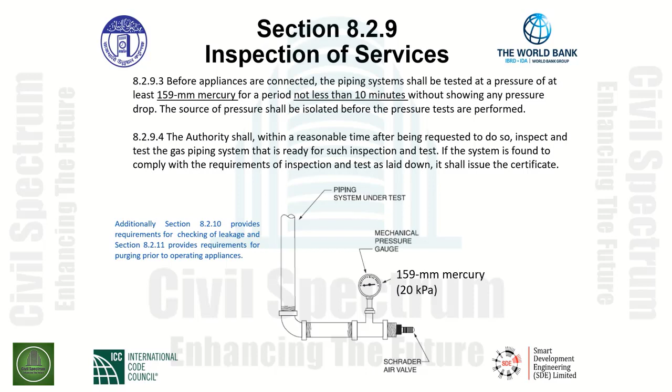Appliance fuel conversion needs to be considered when you are converting from one fuel to another fuel. We have a requirement in our gas code, section 8.5.1.2, and it states the following. It shall be determined whether the appliance has been designed for use with the gas to which it will be connected. No attempt shall be made to convert the appliance from the gas specified on the rating plate for use with a different gas without consulting the gas supply company or the appliance manufacturer for complete instructions. We'll go over further details in the next slides coming up.

The appliance fuel conversion must consider the following items. A mismatch between an appliance and a fuel will create an extremely hazardous condition that can be avoided by examining the appliance label. The appliance label indicates the source of fuel that needs to be supplied to that appliance for proper operation.

Fuel conversions that are not performed correctly can adversely affect the performance of burners, the venting of combustion gases, and proper clearance to combustibles. Another consideration is that fuel-fired appliances are designed to operate with a maximum and minimum heat energy input capacity. This capacity might need to be field adjusted in accordance with the appliance manufacturer's instructions to suit the elevation because of the change in air density at different elevations.

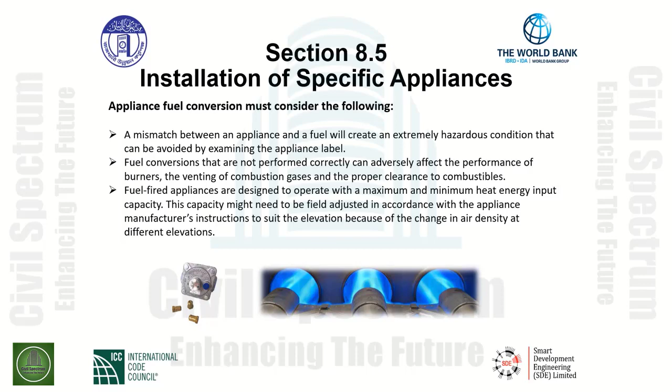When we convert appliances to different types of fuel, the manufacturer may have kits that are available. As shown in the photos below, we may have to provide or install a brand new regulator, maybe to convert from natural gas to LPG. In addition, we may have to replace the orifices or the nozzles in the burners.

This is an example of a label for more than one fuel. On the right-hand side, we've got a red rectangle indicating factory equipped for natural gas. So this appliance is factory equipped for natural gas. However, you can see that there is an opportunity here to provide a conversion. The dashed rectangles that I have indicated on this label give us two separate columns. The first column is for natural gas.

As you can see here, we have the maximum permissible gas supply pressure allowed to be provided to this furnace. For natural gas, it's 2.61 kPa. The minimum gas supply pressure is indicated at 1.24 kPa. To the right of the natural gas information is the propane or LP information. The maximum permissible gas supply when applying propane or LP gas is 3.23 kPa. The minimum gas supply pressure is indicated here at 2.49 kPa. And the hourly input rating on the left-hand side for this particular appliance is 23.44 kW.

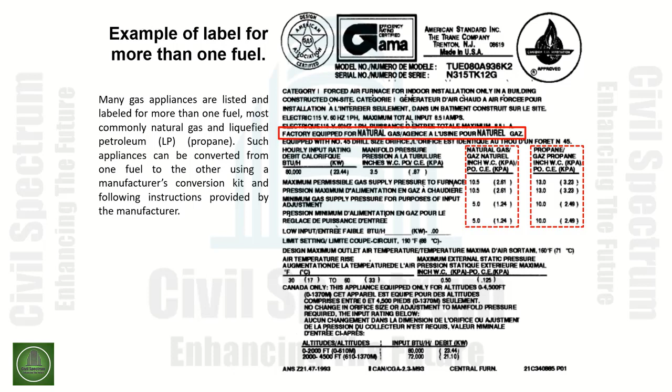Gas appliances shall be firmly supported. We're given this requirement in 8.5.1.6. We need to make sure that the appliances do not exert any undue strain on the connected piping and connections. Now, the next section I want to bring up is related to what we just stated.

In 8.5.1.8, all appliances shall be located with respect to the building construction and other equipment so as to permit ready access to the appliance. We need to get to the appliance for cleaning. We may need to get to the appliance for replacement of parts, adjustments, cleaning of the burners, and regular maintenance.

The picture that you see below is an example of a commercial cooking appliance. You can see the wheels or the casters on the bottom of the appliance. This is utilized to move the appliance away from the wall for proper cleaning, as well as to access the regulator, the pipe fittings, the valves, things of that nature.

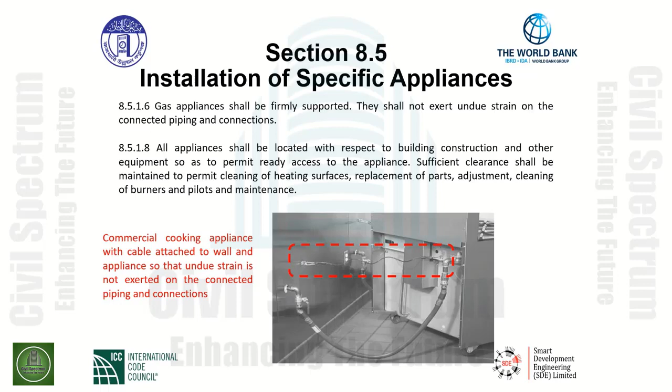However, what is indicated in the dashed rectangle shows that we have a tether made of a cable. The commercial cooking appliance is attached to a cable that fastens from the appliance to the wall, such that when workers are cleaning in back of the appliance, we do not put any undue strain on the appliance gas connector, as you can see here. All the strain will be placed upon the cable and transmitted to the building structure. This is a good safety requirement for any of these appliances on casters, to have the associated cable installed as indicated herein.

We have gas appliances that we need to verify do not cause a problem, in that we do not want any sources of ignition in certain environments. We have a requirement in 8.5.1.4 that gas appliances shall not be installed in any location where flammable vapors are likely to be present or accumulate, unless the design, operation, and installation are such as to eliminate the possibility of ignition of flammable vapors.

As shown in the graphic below, we have a gas-fired appliance. We may need to elevate that appliance to be above any type of flammable vapors that may be hovering close to the finished floor. This is where we have flammable vapors that are heavier than air, ladies and gentlemen. In order to reduce the possibility of ignition of flammable vapors in hazardous areas, the potential sources of ignition must be evaluated and be elevated above the surface supporting the equipment or the appliance. We need to get it up higher so any source of ignition, such as a pilot burner, a spark igniter, a gas burner, does not ignite any vapors, as we mentioned.

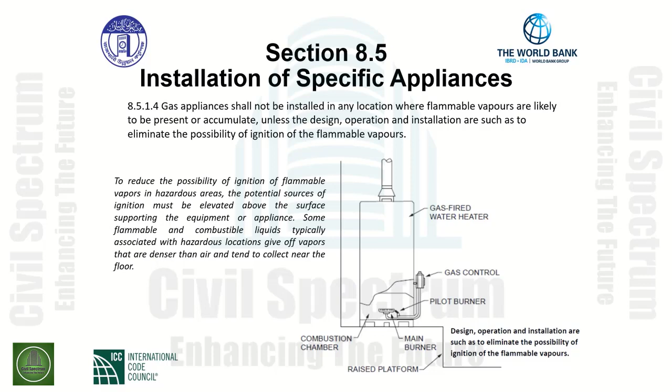Another choice of the designer is 8.5.1.11, semi-rigid metallic tubing and metallic fittings. Aluminum alloy tubing shall not be used in exterior locations. Again, remember that aluminum has corrosive tendencies when located in certain areas. So again, this is prohibited specifically here as being used as an appliance connection material.

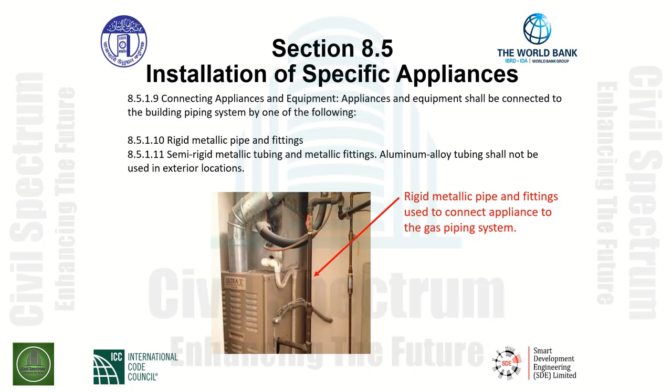We also have the semi-rigid tubing in lengths up to 2 meters that are in the same room as the appliance. We can use listed gas hose connectors to be used as approved, and that is given to us in section 8.5.1.14. Point 15 indicates the connector or tubing shall be protected against physical and thermal damages.

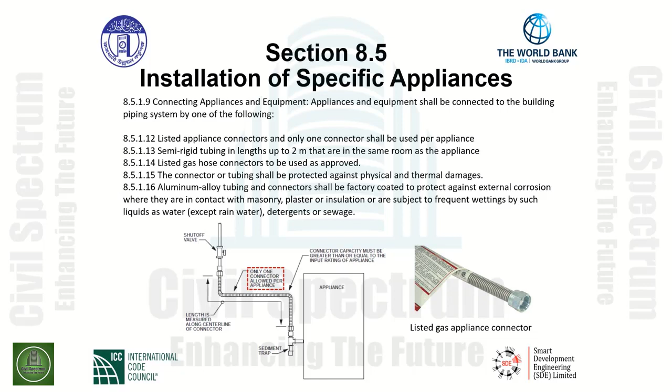Point 16, aluminum alloy tubing and connectors shall be factory coated to protect against external corrosion where they're in contact with masonry, plaster, or insulation, or subject to frequent wettings by such liquids as water, except rainwater, of course. However, detergents or sewage also have a corrosive influence on aluminum alloy tubing. So, point 16 gives us some specific requirements based upon the aluminum alloy tubing when you connect appliances as such, and it must be followed in accordance with that code section.

8.5.1.17 is any appliance connected to a piping system shall have an accessible approved manual shutoff valve with a displaceable valve member or listed gas convenience outlet, and shall be located within 2 meters of the appliance it serves, except as permitted by the authority. As can be seen by the graphic here, we have an appliance and we have the accessible approved manual shutoff within 2 meters of the appliance, as indicated in this code section.